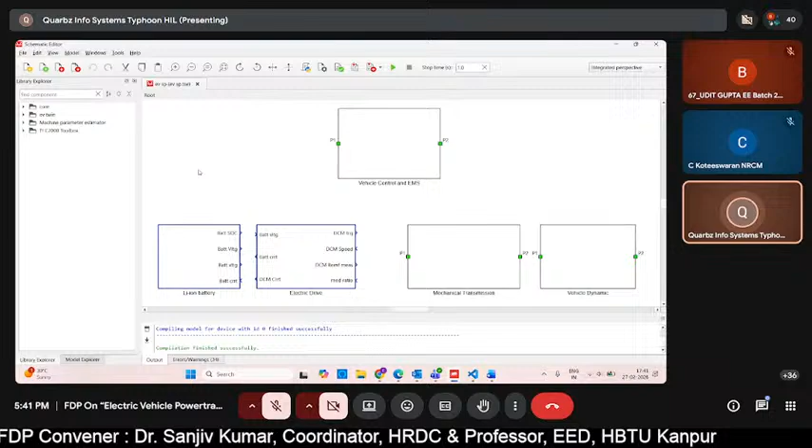As we started doing a hands-on model on electric vehicle-based signal processing, we initially developed around 2 subsystems out of the total 5 subsystem blocks that were supposed to be developed. So we will continue building the same model. As you can see on my screen, I have opened the same model we created last time. Hope you are all ready with your software. If not, I'll give you one minute so you can open the same example model on your PCs, and then let's start with the third subsystem, the mechanical transmission unit.

Before that, let me know if my screen is visible and I'm properly audible. Can somebody confirm? Yes ma'am, the screen is visible and you are audible. Thank you. I'm waiting a few seconds, then let's start. Meanwhile, you can all open the model.

Good evening, Ira. Yes sir. Good evening, actually sir, before this talk I had a talk. Yes sir, why sir. I was not available when you were introduced. I'm very sorry for that. I welcome you. Okay sir. I hope my learners already welcomed you. Yes sir, yes sir, the introduction was given. Thank you, sir. Okay sir.

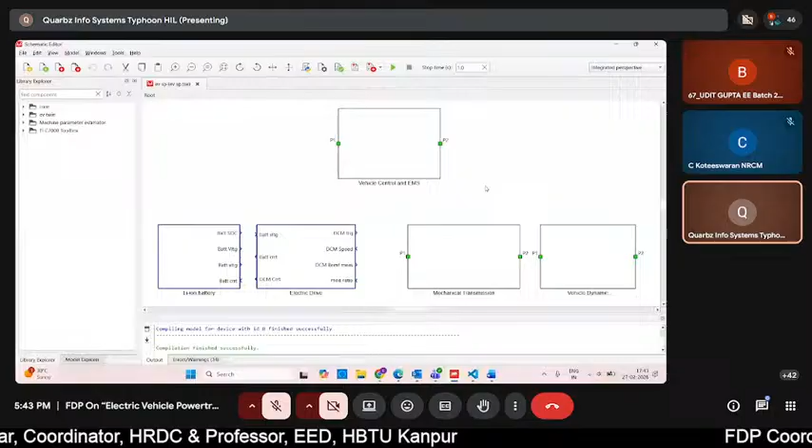Okay, then let's start with the third subsystem. Until now we have created 2 subsystem blocks: the first one is the lithium ion battery pack, and the second one is the electric drive unit. So we know that in the vehicle we are creating, we are developing the model based on the components of the signal processing library, and this complete library has certain blocks which are defined in blue color.

As I specified initially during the session, Typhoon is basically having 2 different types of processors. One is for running the plant side simulation at a higher rate, at the nanosecond scale, and the second one is for the CPU side simulation, where we run the signal processing and controller side part at the microsecond level. So now we have the third unit, the mechanical transmission.

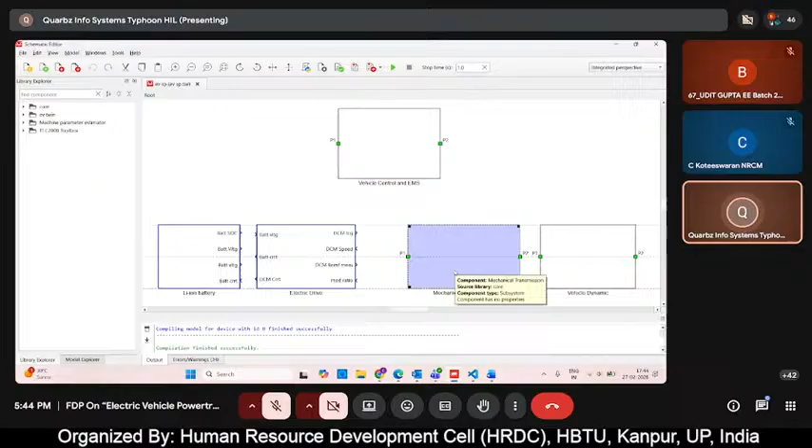We know that in this subsystem, all the subsystems are actually connected to each other, and there will be some signal which interacts with the other units as well. So let's see what is there inside the mechanical transmission. Just like we did last time, double click on the mechanical transmission subsystem block.

We will delete the part already mentioned there and start developing the model. So let's first take a component called signal input port, next we will take another signal input port, and lastly we will take a signal output port.

Next, let's type in and take a termination block. We are using this termination to denote what type of movement will happen when we apply the brake force. So termination means ending something, so we will give this particular signal towards termination. The name of this signal, I will keep as brake force. Next we have the termination block.

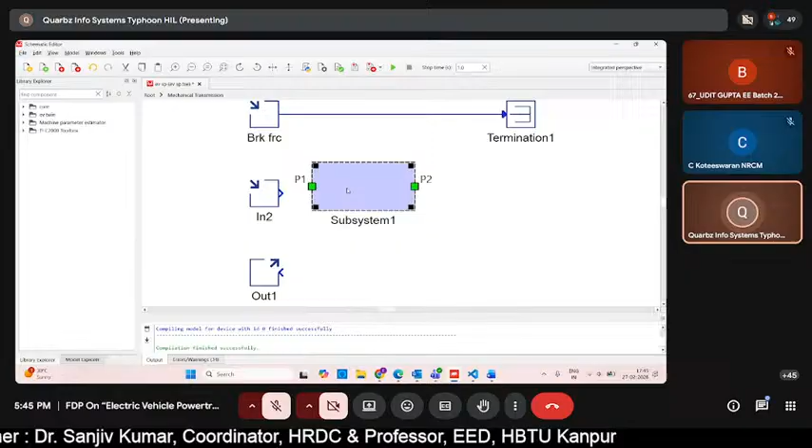Then at the bottom, we will take another subsystem here. So just search for a subsystem block and place it like that. Beside it, we are going to take a gain block. After the gain, we will take a signal output port.

Similarly, at the bottom, we will take another gain block. We are going to reverse the direction, connect the output to the next output, and we will take a signal input port here. I'm also going to place it so I flip it and connect the output of this signal input to the gain block.

So I hope till this part it is clear. Now we will also name other input outputs. So we have DC motor torque, and the next one we have is DC motor speed.

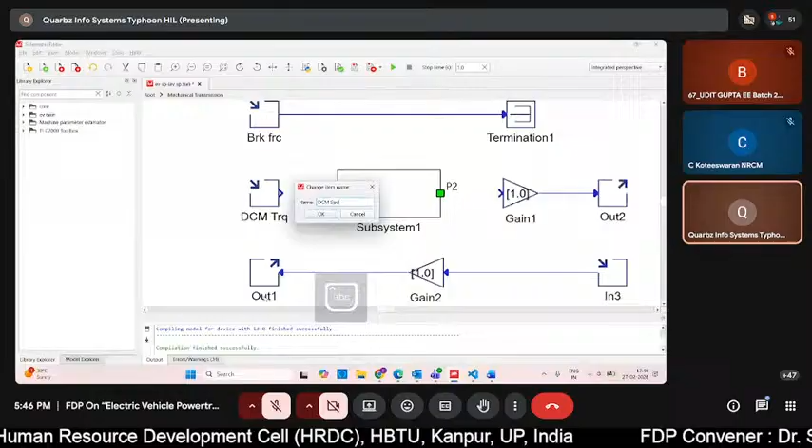The gain blocks that we have taken represent the mechanical transmission ratio, so we are going to name them MT ratio. The value of this has been pre-calculated for this example using the standard equations, so the value for both blocks will remain the same.

Lastly, we are converting these torque and speed signals into the transmission unit signal. So whatever mechanical parameters we had are now transmitted and converted to force and velocity signals - we have wheel force and wheel velocity.

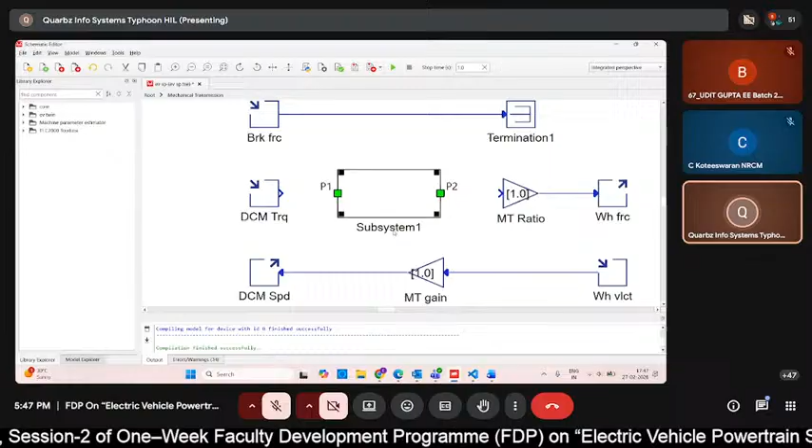Next, the name of the subsystem is efficiency. Inside this block, we will take a signal input port, then another gain block, and another gain block at the bottom. Over here, we will take a component called signal switch.

Let me name the gain blocks. So this one will be traction, and this one will be braking.

After this, we will take a termination block over here, connected to the output of the switch. And at the top, we will take a signal output port.

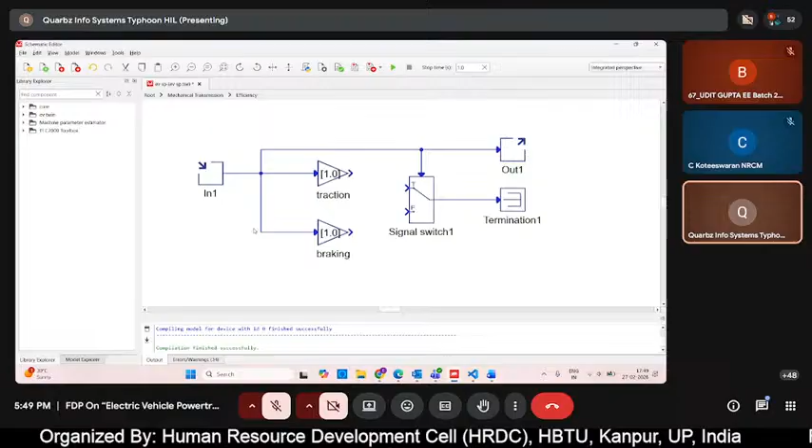Now we will connect the braking input also to this input coming from the signal input port. We will connect the top control signal of the switch also to the same line, and the output to the control signal. Let me just connect traction and braking to the signal switch.

I will explain what we have created here - we are trying to see the efficiency of the system. The input coming over here is our DC motor torque. Now torque, as you know, is applied from the machine which is inside the vehicle. When we discussed last session before starting this model,

one was the positive force, which we also know as traction force or propulsion force, and there was also the resistive force. So in case of traction force, whenever the motor or machine is supplying some torque, then only the vehicle becomes in motion, and that is the positive force. And then it is having a factor with the resistive forces, and we get a net force, which is the force that helps us know what type of propulsion the machine is doing.

So in this case, whenever the torque input is coming, we are getting the information and multiplying it with a factor for the traction and braking gain, then moving towards the signal switch. In both cases, if there is some torque available, definitely the machine will be in motion. So our traction force will be greater, the signal switch condition will be true, and we will get some output which will be our wheel force.

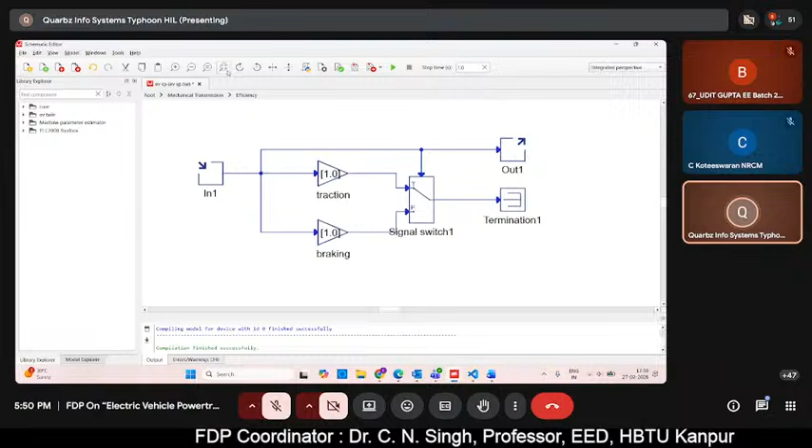But in case we don't get any input in the torque command, the braking will be automatically considered and the vehicle will be stationary. So that value will automatically go to the termination block - that is what this signal switch condition is denoting.

Now let's just name the traction and braking, and define the value of traction and braking gain. Double click on traction - this one is 0.92. And for the braking, it is 1 divided by 0.92, just reverse of the first one. Traction and braking: 0.92 and 1 divided by 0.92.

Then I will come back to the mechanical transmission unit. So at the top over here, you can see root, mechanical transmission and efficiency. From efficiency, we will go back to the mechanical transmission subsystem. Now we have the input and the output, so let's connect it to the row.

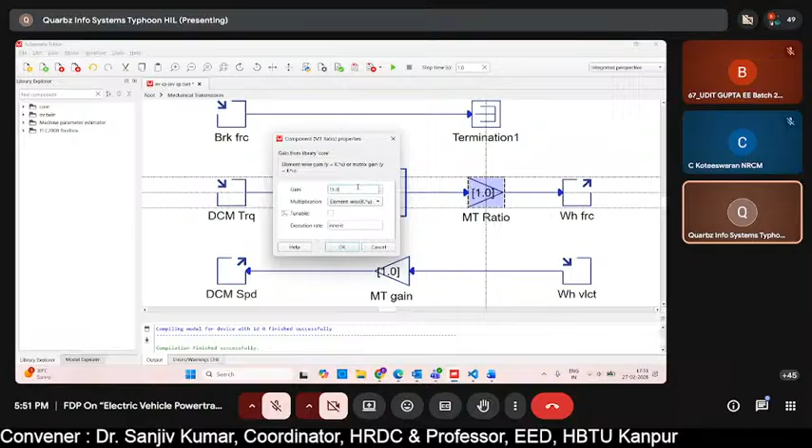Everything looks okay. Then we have to define the value of the MT ratio. Double click, the value will be same in both lines - the value is 15.0654. The second one as well, 15.0654.

Okay, now we have completed the mechanical transmission unit. I hope all have completed till here. Is anyone still doing it, or can we continue to the next subsystem?

Okay, so let's just continue to the next one, which is the vehicle dynamic unit. Let me just check one thing.

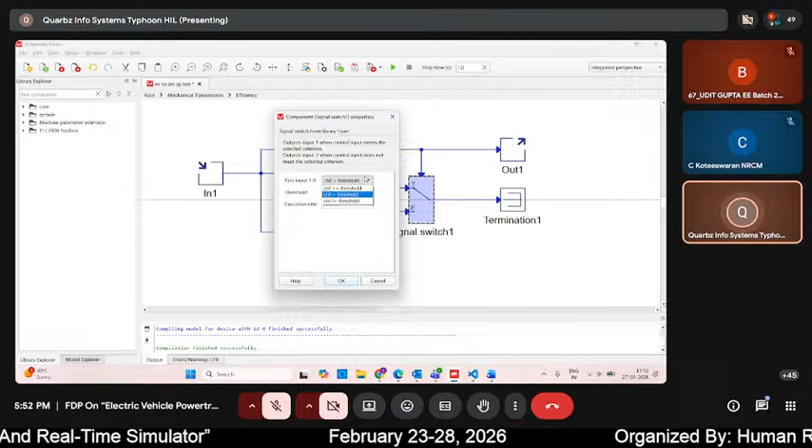The signal switch condition - okay, just one little change in the signal switch. We will select the condition of the switch to pass the signal with the control command greater or equal to the threshold, and the threshold value we are going to put as 0.

Let's come back to the root window. Now we have the fourth subsystem, that is the vehicle dynamic part. So let's quickly start making the model.

We will delete the initial part. Now let's start with the blocks, so again we will take a couple of input outputs. Let's search for the signal input block. After this, we will take a sum unit.

We will just change the symbol of the unit, so it will be plus minus. The input we are going to connect at the top of the sum block. After this, we will have a gain block, and after the gain, we have the integrator block.

And then we have signal output port. So 2 of them we will be taking. Let's place it like that.

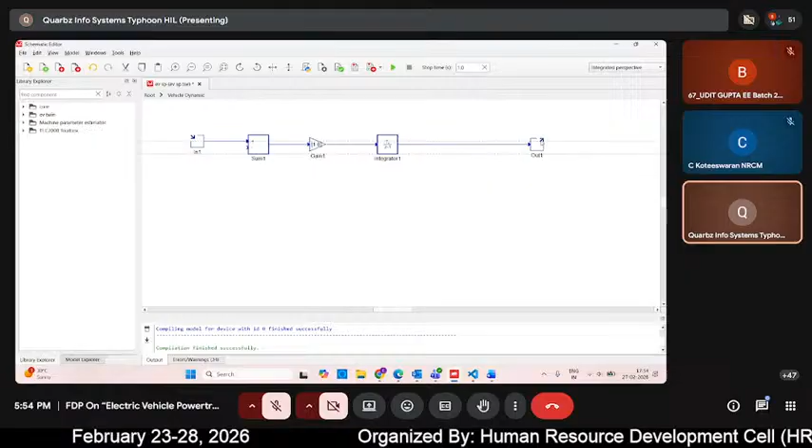Next, we will take another block, that is probe over here, so again, to just kind of visualize the signal that we are planning to use here.

Okay, let's start naming them. So we have wheel force here. After that, we have vehicle tractive force.

Next, we have the gain block by the name of mass. Integrator will be same, the output we will name it as vehicle velocity. Then we have another gain, another signal output, again we will name it as vehicle velocity.

At the bottom of this, now we will take a product block. We are going to flip the direction, and instead of 2, we will take 3 multiplication sign.

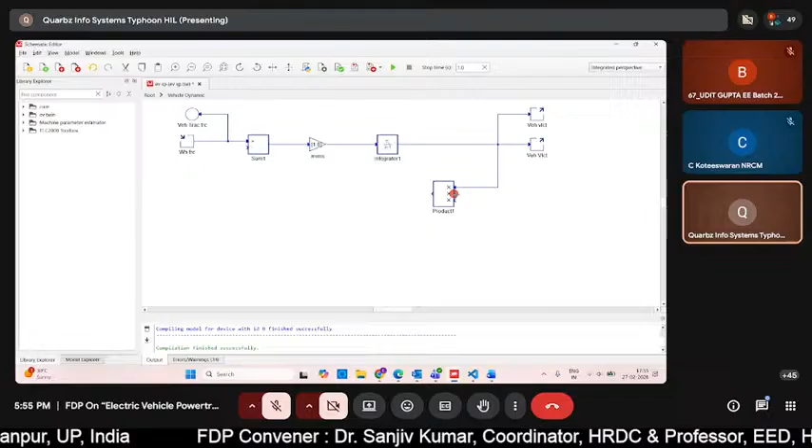The top part, we are just going to connect it to the same line. The second arrow, again, we are going to take it here. The third one, we are going to connect to a constant block.

We can flip this and just connect the constant here. We will be taking a termination block, and we will connect another constant here.

So the output of the product will become the input for the first, input for the sum. The second input will be again connected to another constant block. Again, we can flip and connect it. And the third one, we have again a constant block and a gain block.

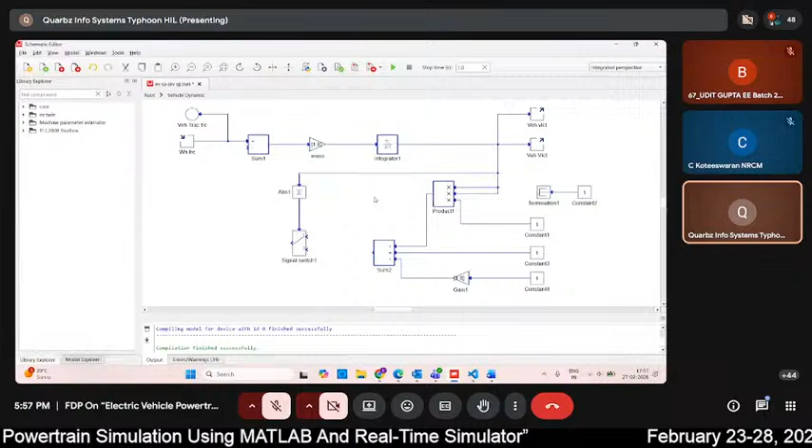Here we will take a signal switch. At the top, we will absolute value. I'm just going to rotate it downwards because this is going to go as input to the signal switch. And this absolute value input is going from the velocity, the vehicle velocity signal.

At the bottom here, again, I'm taking one constant block and just connect it to the false part of the switch. The true part will be connected to the sum signal, the output of the sum signal. And lastly, over here, we will take signal output port, and along with that, we will also take a probe.

Now we can just one by one name all the components what we have taken. So again, this output at the top you can see is the wheel force or the traction force. Now what we are doing is we are calculating the vehicle resistive force as well, so that we know what is the net force. So now for calculating the vehicle resistive force, let's see what all input we are considering.

If you remember, we discussed about some of the equations that are being used. So this is the vehicle resistive estimated. Then at the bottom we have the resistance force. Over here at the gain block, we will name it as mass, and will be the road slope block.

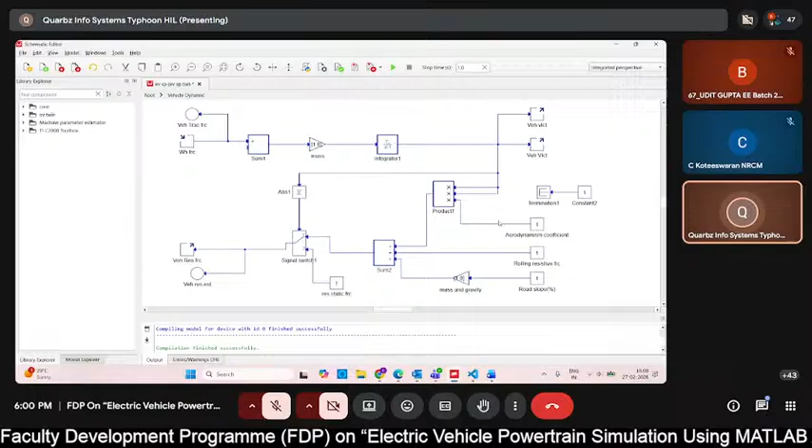In the bracket percentage. Above that, we have the rolling resistive force. At the top of that, we have the aerodynamism coefficient. So if you remember, following the same equations, we have the aerodynamism coefficient. In that equation, we basically use the mass and along with that, the velocity square and the aerodynamism coefficient as well. So all three we have considered.

If you remember, mass was usually used in all the equations. So along with that, we have the rolling resistive force. So this is the total force which is calculated. So already it consists of all the calculated value for mass and rolling resistive coefficient and so on. So whatever total value was calculated, we will directly feed it here.

And the third one, that is road slope, so this one is for the gradient force. So if you remember, whenever the vehicle is moving up or down the slope, so there will be some angular force applied. However, the value of the slope will be 0 in this example, but at the front of that you can see again the same multiplication with the mass and gravity, and then going towards as an input to the rolling resistance. So this is just demonstrated to explain how the rolling resistive is basically calculated.

Over here at the top, you can see there is one signal coming from the constant which is going to termination directly. So this is the wind speed. So in this case they are considering zero wind speed also. So that's why the aerodynamism force in which the wind factor is taken, that will actually not be considered in this example. So again, let's just quickly name all the blocks, and after that we will just provide all the values.

Okay, I can see one signal we did not connect, that is the bottom of the sum block. So this is definitely the difference between the traction and the resistive force to calculate the net force. So just connect the minus part of the sum block directly with the resistive force.

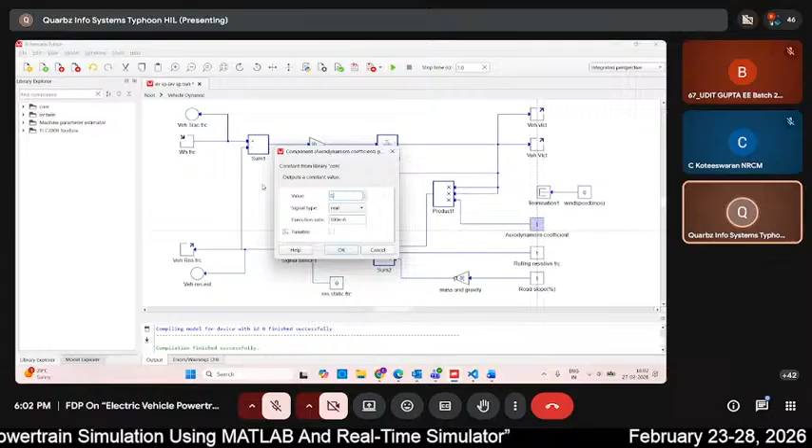After this, we have the wind speed constant, so this value is again 0. Next, we have the aerodynamic coefficient, usually between 0.4 to 0.5. So it is kept at 0.428 in this example.

Next, we have the rolling resistive force, calculated as 135.77. And lastly, the road slope is again 0. Since this one is in percentage, mass and gravity will be 692 multiplied by 9.81, then divided by 100 to convert the percentage to the factor. 692 is basically the value for the mass of the vehicle.

So this is it, we have just provided the inputs for all the blocks. I think this subsystem is also complete. So is anyone having any questions till this part, or anyone is just completing, or we can move to the next one?

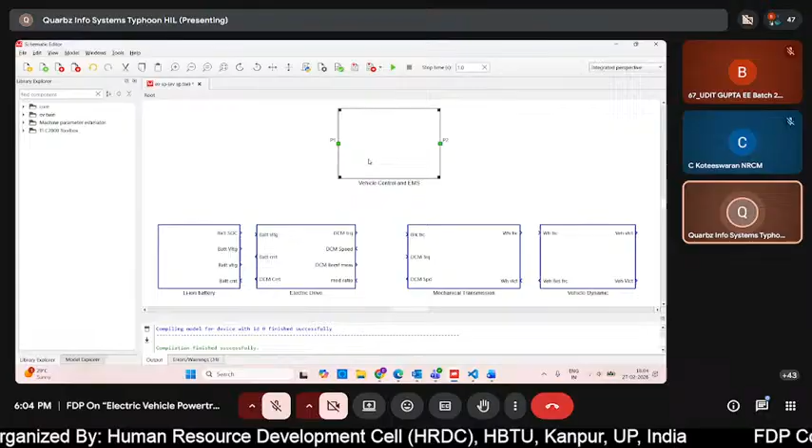Let's move back to the vehicle control and the EMS part. Again, double click on the subsystem. Let's start creating the last subsystem part also. Once this subsystem is complete, our entire model will be completed and we can directly move towards the SCADA panel. So let's start taking the blocks.

In the vehicle control unit, as you know, this is the essential part of the machine. It is basically controlling, monitoring all the things for all the subsystems. So there will be multiple inputs and outputs connected over here. First of all, let's start again with a signal input port.

Let's keep naming them also. So this one is coming from the battery part, so the name is battery SOC.

After this, we will just take a gain block. The calculated SOC will be somewhere in a decimal place, so we will just convert that to percentage. I will just change the name of this gain block to percentage, and we will connect a probe here to measure the percentage of SOC of the vehicle. Let's name the probe as battery SOC estimated.

At the bottom here, we will connect a signal switch, and the control input of the signal switch will be connected directly to the SOC. We will take two constant blocks here. The first one, I will just connect it to the true part. And the second one also, I'll connect it to the false part.

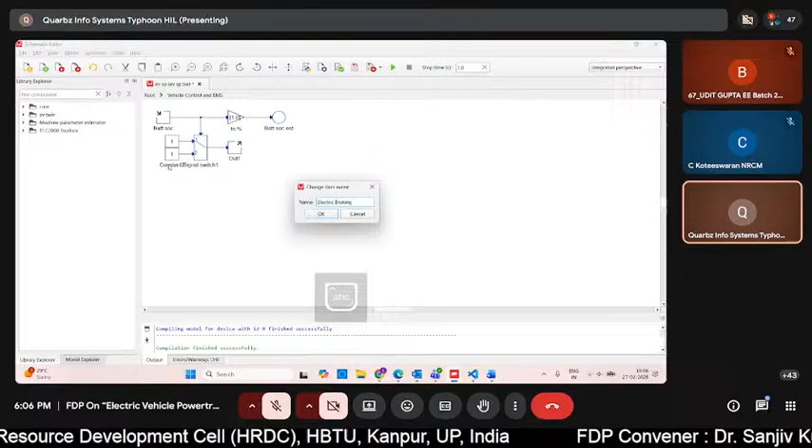And the output is named as brake force. Next, we will take a clock input. Next, we will take a block for the input of the drive cycle.

Over here, we are going to take a different block by the name of 1D lookup table. The lookup table is basically used when we want to provide some value, which is basically x, and y is the function of x. So we have vector input, or multiple data points for x and the function of x, and we will just directly feed them here. The output will automatically follow as per the value that we have fed in the x and the fx part of this component. So let's search for the 1D lookup table, and we will just connect it from the clock.

And I will just name this as ECE drive cycle, or driving cycle. Let me just put it a little bit lower.

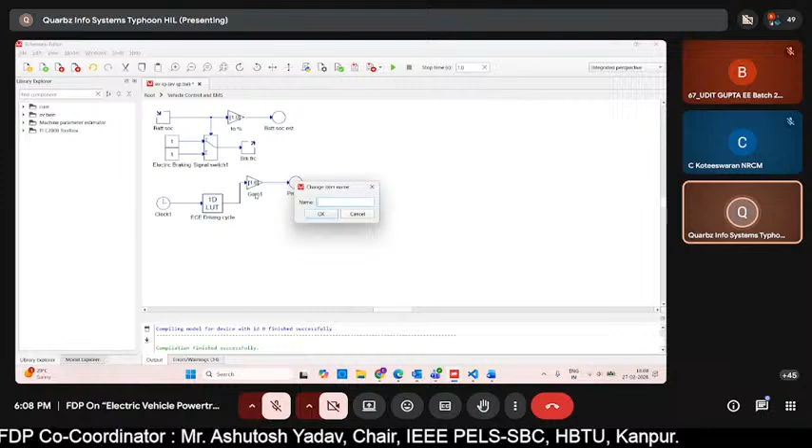Okay, let's take a gain block at the top. We'll connect the output here, and we will connect a probe to the output of the gain. Let's name it as to kmph, and the probe as requested speed.

At the bottom, I will take another subsystem block.

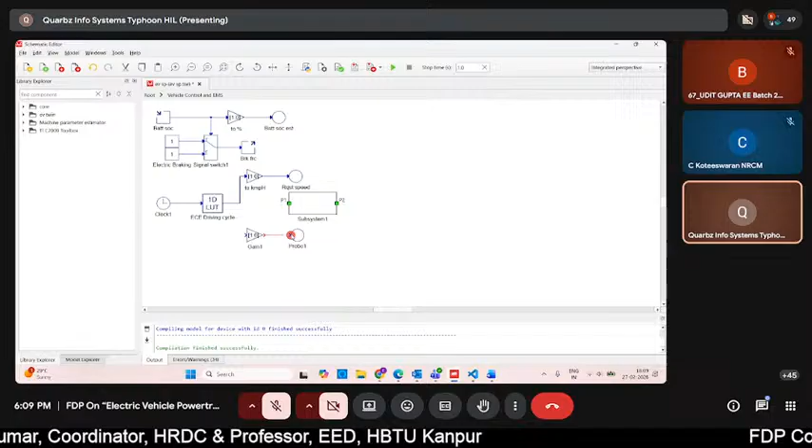Below this, again, I will take a gain block. Similarly, another probe over here. Let's connect them. And again, connect this one to the initial input. So we will take a signal input port.

Now again, I'll change the name. This one is vehicle velocity. The gain block is known as to kmph. I've used the same syntax, and the probe will be the vehicle speed.

So what we are doing is, because this is the controller part, we are just having a subsystem block here, which is going to do the operation of the PI control. We know about very common PID controllers. Usually the PI control is implemented inside such strategies, and it will be doing the proportional as well as the integral based control. So what we have to provide as input is the reference speed that we want to set, and the measured speed that we have from the vehicle. Once we compare the two, whatever error we get, accordingly the controller behavior is shifted, and the successful control is when we are able to achieve zero error in the complete functioning of the model.

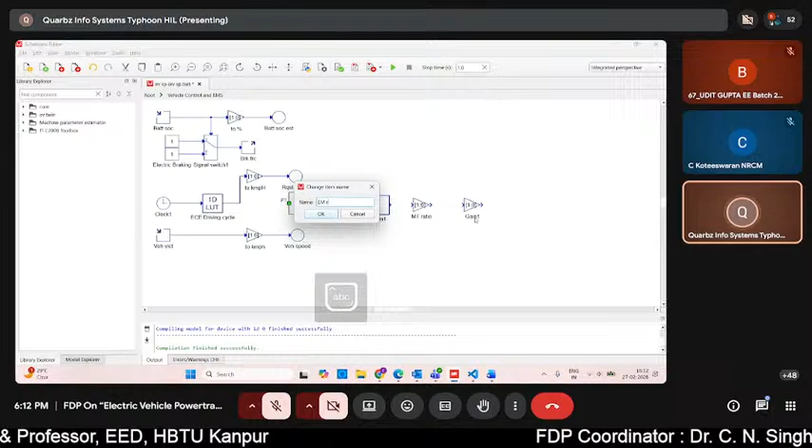The values of these constants will always be the same in the entire model. Again, we have another component here. So now after it is converted to the mechanical signal, we want to convert it into the electrical signal. So we are also using the EM ratio, or EM conversion, I can name it. After converting these signals, we will again have to feed it to the PI control.

This time we are doing the PI control for the current part. Let's again search for a subsystem block, and for a reference right now, we are just placing it here like that. And after this, we will again take a sum block.

After the sum, we are going to take a product block. The output of the sum, we will just connect to the first input of the product. At the bottom, we are going to connect the battery side voltage. And towards the end, we will just have to connect a limit block, and we will place a probe to observe the final output.

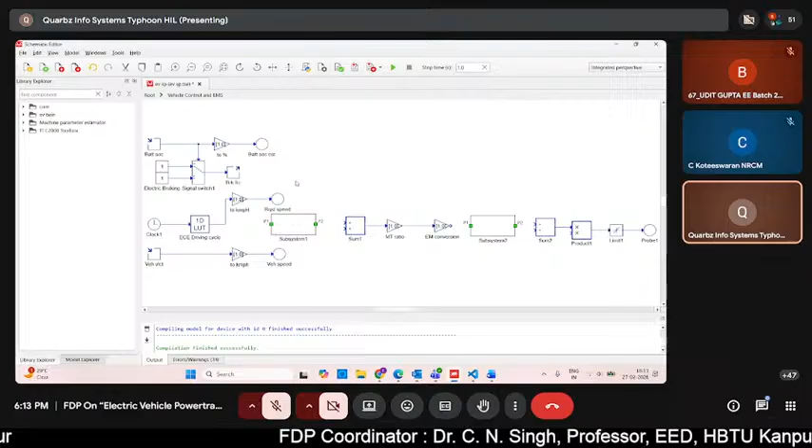Now, first of all, what we will do is create the subsystem part of the model. So let's get the PI control. I will double click on the first subsystem which is there, double click on subsystem 1. I will delete this part, and over here, I'm just going to take the reference signal, so I will take a signal input port. Similarly, I will take another signal input port.

So I will name the first one as measured. Then I will take a sum block and I will reverse the sign to plus minus in order to compare the reference with the measured. Let's connect them. Then we have the gain block.

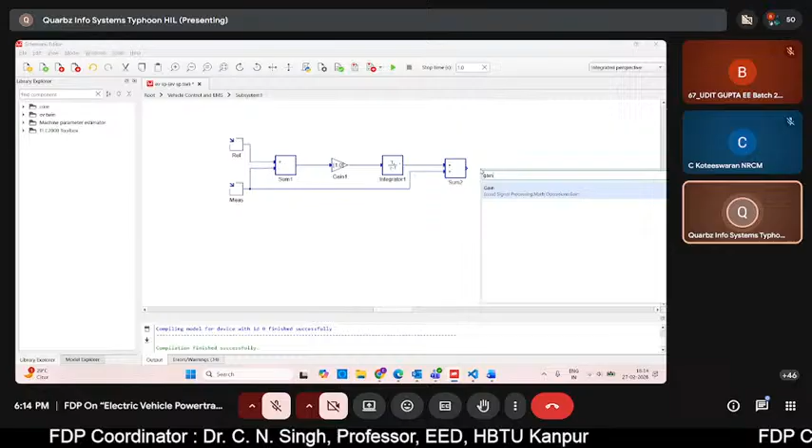After this, we will take an integrator, and we will again connect a sum block over here. Connect the top part of the sum again, the bottom we will again connect to the measured. And the final output again going to the gain block, and finally, we are using it to go to the signal output port.

Now we will just change the names. So the gains have to be named as, this one is for the KI input and the second one is for the KP input. So the proportional and the integral coefficients, we have just named them. For the first one, we have the value of KI calculated as 2.372. And for the second one, that is KP, we have the value as 6.5657 e to the power 3.

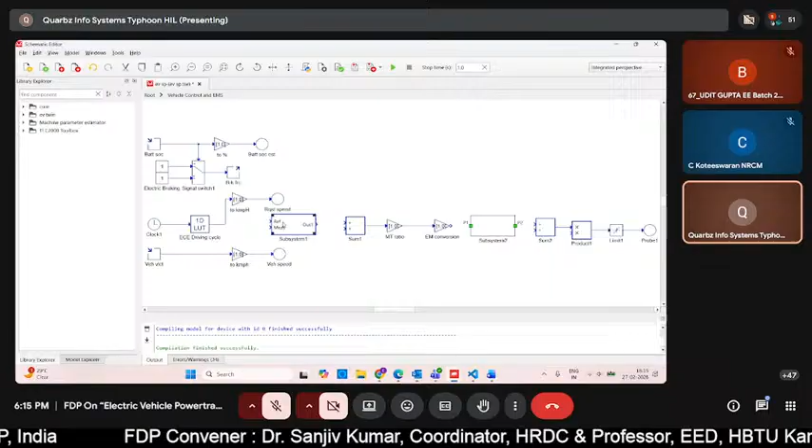So that's it, the PI control part is done. We can go back to the model now. So we have the vehicle control and the EMS unit. Now what we will do is just simply connect the reference to the top part.

So reference we connect here, and the measured signal, we are simply going to connect it at the bottom, that is on the vehicle velocity. After this, the final output will go to the top of the sum block.

The bottom part now, we will just connect the bottom to the vehicle resistive force. I will take another signal input port, change the name to vehicle resistive force, and connect it at the bottom of the sum block.

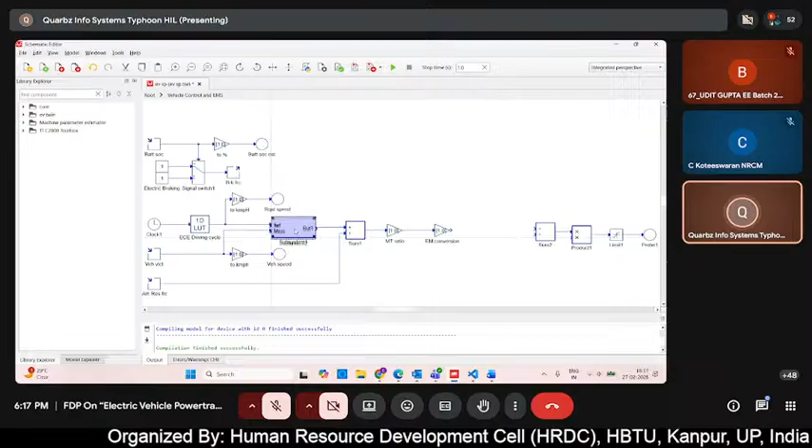Next, I will delete subsystem 2, and simply copy and paste subsystem 1 block here, so we don't have to create the same subsystem again. The blocks will be the same; only the difference will be in the coefficient value of Kp and Ki, so I will edit those values. Remaining part I'll keep the same.

At the measured input, we have the DC motor current. So again, I will take a signal input port and place it here, change the name to DC motor current, and connect it to the measured part.

After this, we again have the sum block, so just the top part we are going to connect to the sum block. Next, we will take two more signal input ports for the final signal input.

This one is the DC motor back EMF, so we will place it and connect directly with the sum block. Lastly, we take the final signal input port, and this one is the battery voltage. So change the name, battery voltage, and connect it to the bottom of the product block.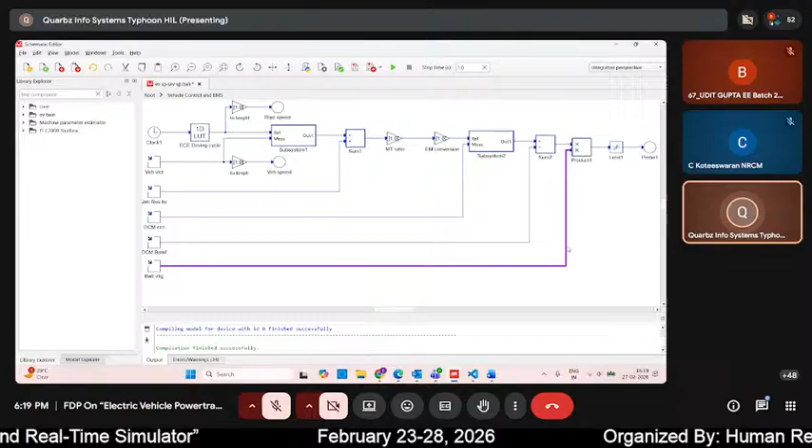Firstly, we will connect the probe at the very last signal, that is for the battery voltage. Let me search for probe, and we can connect it here. Again, I will name it as battery voltage measured.

Next, we will have a gain block, so let's search for gain. I will take another gain block here. Basically the back EMF that we are doing the electrical conversion, and then we are providing it to another gain which converts it into RPM, so we have it converted into speed. The EMF is being converted using the EM conversion.

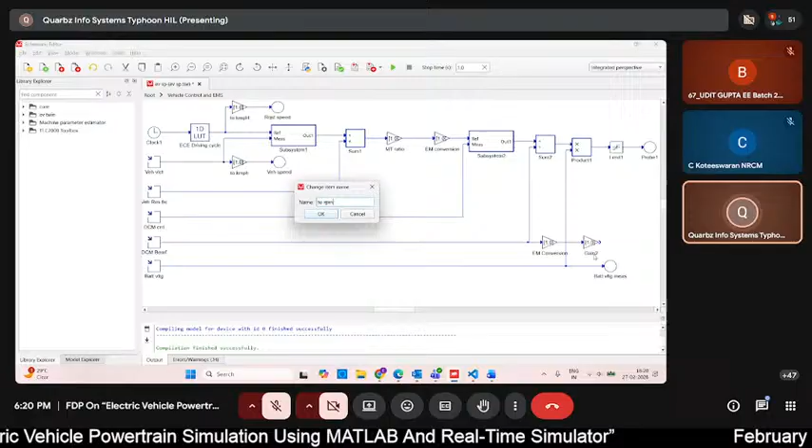This gain will be converting it to RPM, so I will name it as to rpm, and lastly connect a probe again. I will change the name of the probe; this time the name will be DC motor speed.

Before this, now we will connect another probe here on the DCM current, so we will name it as DC motor current measured, because all of these are the measured signals, not from the drive cycle input that we will be providing.

Then we will connect another probe at the output of the sum block, and name it as DCM voltage requested.

Now at the top of the subsystem, between the MT ratio and the EM conversion, we are also going to take a gain block here, and again use the same name, EM conversion.

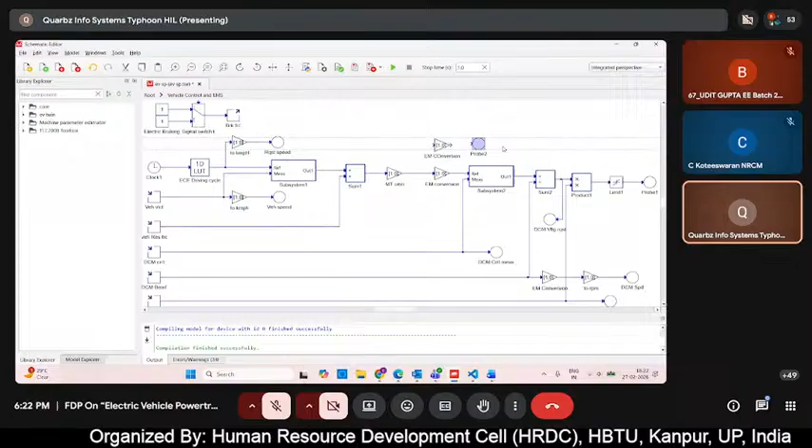We will take a probe over here, connected between the two. The probe is going to be named as DCM requested current.

And at the top, we have another probe connected directly to the signal, and we will change the name to DC motor torque requested.

Let me just open that sheet. Just give me a moment, I'll reshare my screen.

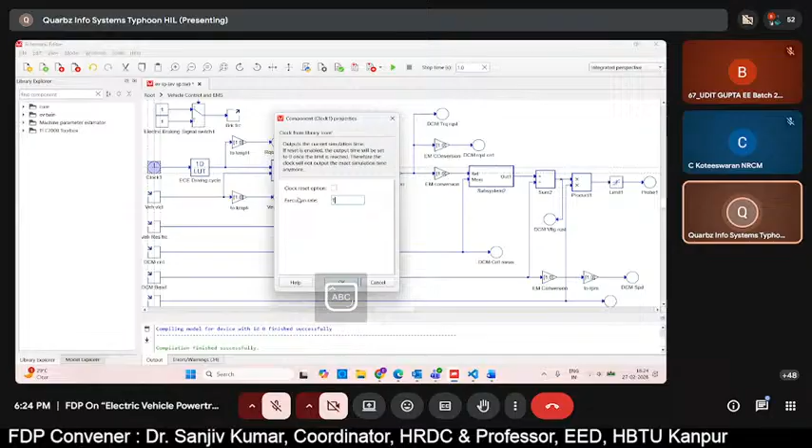Now let me show you where we are going to use these inputs. Let's directly come back to the model. So first we have this clock block. Double click on clock and we will delete the rate value and term it as a variable called TS.

After this, we will take the drive cycle input. Double click, and in the input value we will delete this part and paste the part which is inside our sheet. So let's take the input x value. You need to include the brackets as well, so just make sure that you are using all the values.

Just in the same way, I will paste it over there. Same thing I have to do for the fx part, we will use the y values here, and paste it here. After that, we will select the implementation as non-equidistant. We have the extrapolation method selected as linear, and the execution rate we will leave at inherit.

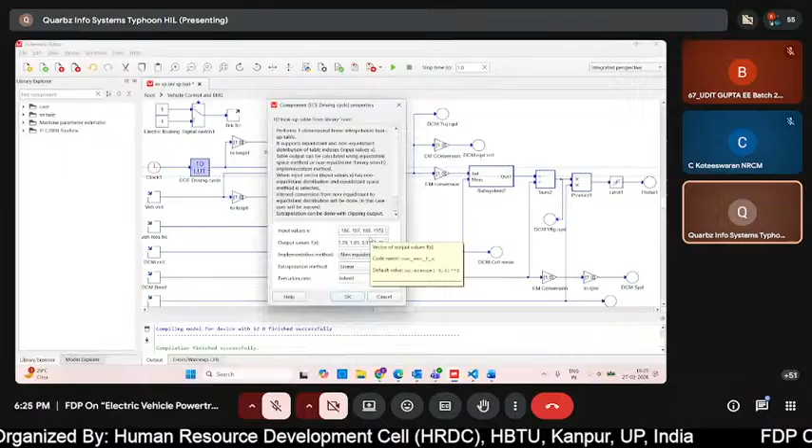Now these data points don't actually have time synchronization with our model. That's why we have used a clock block before them, so that whenever these values are executed, they are executed at the same rate at which the rest of the model is running. The model is running at a rate of TS, that's why we have used a clock to synchronize this graph to also run at the same execution rate.

Next, we have used the kilometer per hour gain block. We are converting this drive cycle output, that is our speed and the actual vehicle velocity, into kilometer per hour range. So what we will do is just multiply by a factor of 3.6, and the same thing at the bottom, 3.6. We have already given the values for the KP and KI system.

So let's mention the value of the other gain blocks. At the top, you remember that we have used a percentage gain block. So this percentage gain, the value will be 100, because we are simply converting the input value of the SOC into the percentage SOC.

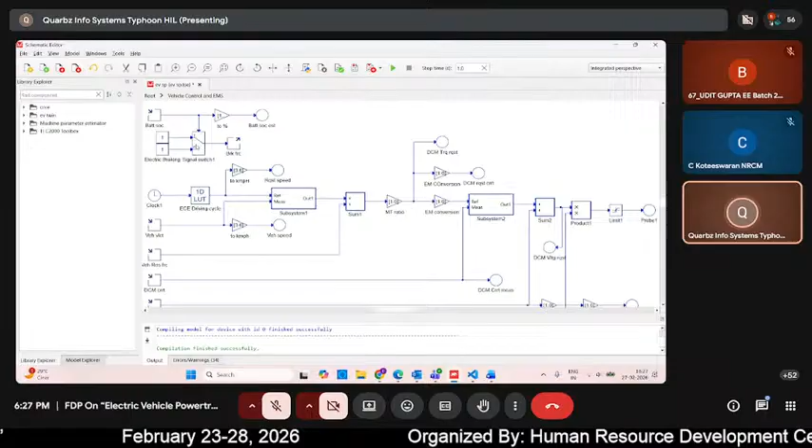After that, we have the signal switch. In the signal switch, we will use the condition control is greater than and equal to threshold, and the threshold we are going to keep as 0.9.

Next, we have the electric braking. In the electric braking, both the inputs we are just going to keep a value of 0, and the execution rate as TS. This is 0 and this one is also 0.

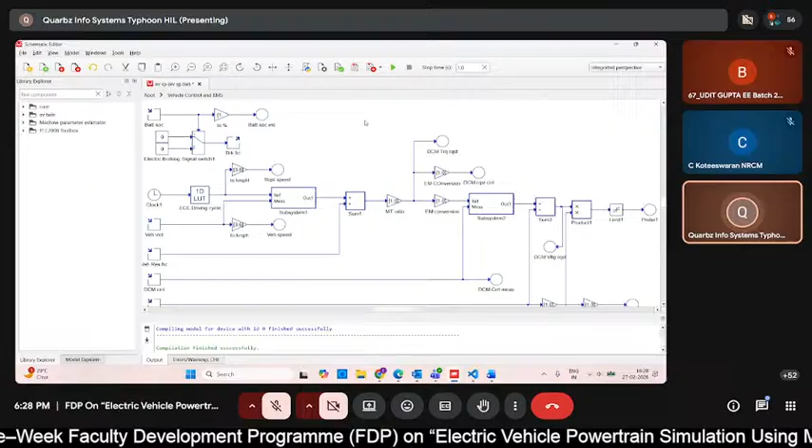So we are just denoting the braking through this part. Basically, whenever there will be some SOC, it definitely means that yes, the vehicle is moving and the battery energy is being utilized. If the SOC is increasing, that denotes charging. If it is decreasing, that means the vehicle is moving and the battery power is getting consumed. So in that scenario, whenever we have the SOC, we will read out what is the estimated SOC. And in case whenever there is no input coming from the SOC side, we will consider that the value is stationary, the vehicle is stationary, there is no movement. So automatically the brakes have been applied and the brake force will be generated.

Next, we have the subsystem for the MT ratio. Let's go towards the next block. The MT ratio value will be same, which we used in the mechanical transmission unit. This time we will just divide it, so it's 1 divided by 15.0654.

We have the same value for the EM conversion, just in the factor. So we have 0.2865, and same for the above one.

And there is another EM conversion here at the bottom. So this one also uses the same value, 1 divided by 0.2865, to RPM, which is placed here. So we will just keep the value as 30 divided by np dot pi.

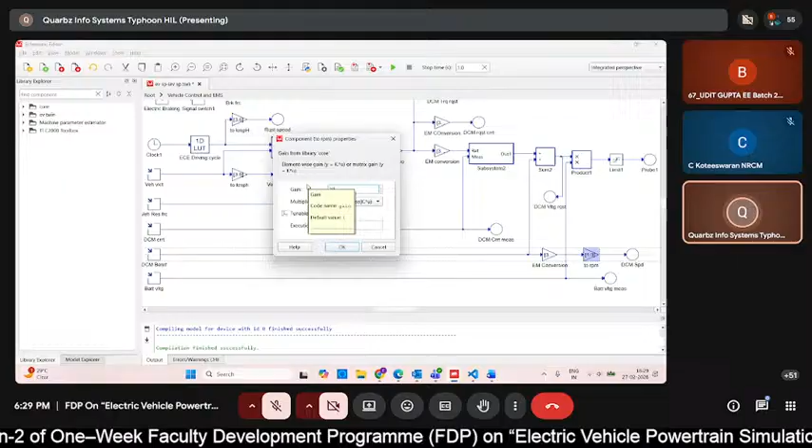Now in Typhoon, because it is a complete Python based environment, whenever we are using a variable associated in the Python library, we have to use it in this syntax: whatever is the function name, dot whatever is the variable name. So inside the numpy function, we have the value of the pi variable stored, and we use it in this format, np dot pi.

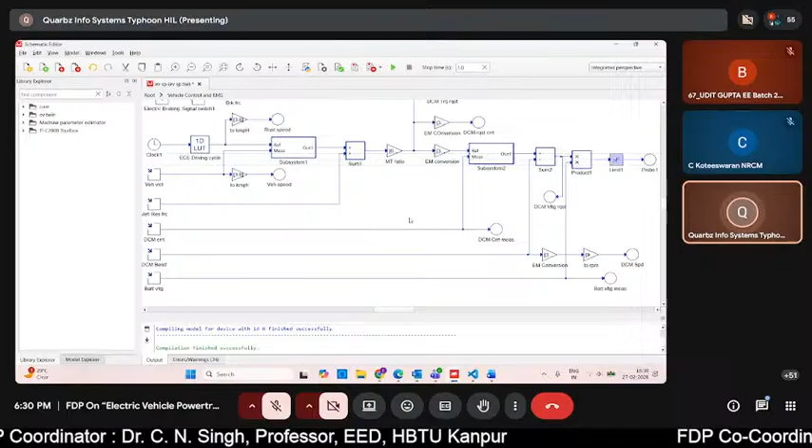I think after this, the second subsystem also, we have just pretty much provided all the values. So what is remaining is just the limit block. Let's put the final limit block. The upper one we will keep as 1 because this is the modulation signal, and the lower one we are keeping as -1. And lastly, we have to finally declare the execution rate of this model.

So at what time rate is the model completely going to run? Before that, let me come back to the model and we will just initialize it. Like I told in the first session, we have this model initialization script. So just open this script and we will define the value of the TS variable over here. We have 1e minus 3, so at 1 millisecond we are going to run this particular model. That's it, let's click OK.

Now, the only thing left is to connect all of these subsystems with each other. Once the connection is done, we have only one work remaining, that is to construct the entire SCADA panel. Of course it will take some time, but let's start moving.

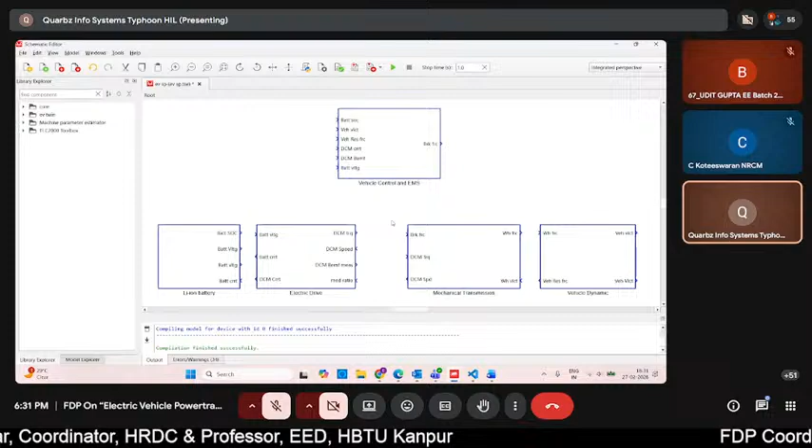So for connection of the entire subsystem, let's follow step by step. There are some inputs and outputs from every subsystem. Now we have the option to place those inputs and outputs in such a way that the model looks clearer. Because I already have an image with me of the model, I exactly know which signal is going to which block. That's why I'm just going to do the placement of these signals. This is not at all a compulsory step for anyone, so you don't need to follow this, but you should at least have an understanding of how to do it.

So suppose I start with the lithium ion battery. I know that I require the battery SOC at the first output, so I'm just going to double click on the battery SOC signal output port, and the side I will select as top, and the index number I select as first. When I go back, this is showing at the top, and right now no other signal is there, so this is showing at the center. But suppose if I select another signal at the top, then this will come at the first position.

Similarly, I need one battery voltage also at the top, so I will select top and index number 2. I need one battery voltage on the right side, so I'll select right, index 1. And lastly we have the battery current, so this one is again on the right, index 2.

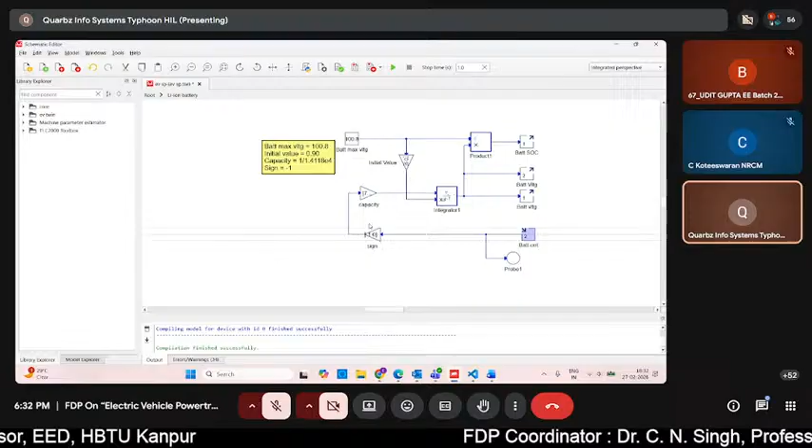Next, we have the electric drive unit. Double click again. So we have battery voltage and battery current on the left, index 1. And this one is again on left, index 2. We have DC motor torque, this is going to the mechanical transmission, so this one will be on right at the first index. And the speed is also going to the transmission unit, so again right and at second place.

Lastly, we have the mod ratio, this input is basically going to my controller, so I'll have it at the top with auto index, or I can just leave it like that. Okay, I can put 3. There are 2 other signals: DC motor back EMF and DC motor current.

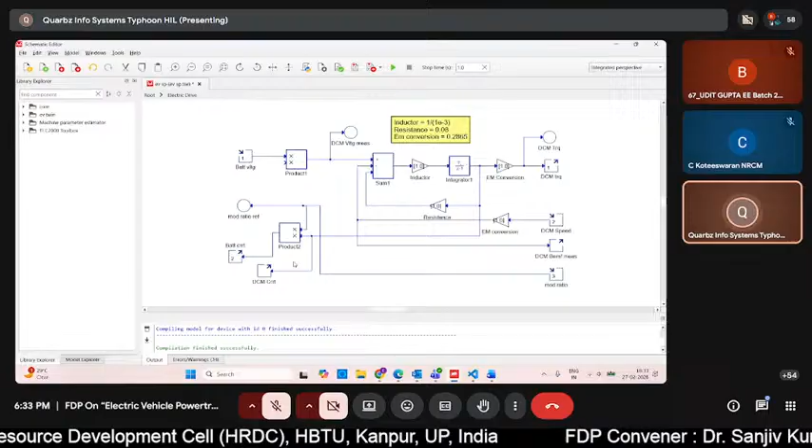So firstly, we will take the DC motor current, this is also at the top, index 1. And lastly, the back EMF, this is also at the top and at second place.

Lastly, the third subsystem that we have is the mechanical transmission. So the brake force is coming from the controller part, so we'll keep it at top. The DC motor torque is basically coming from the left side at position 1. This is also on the left. And wheel force and wheel velocity will be on the right, going to the next subsystem.

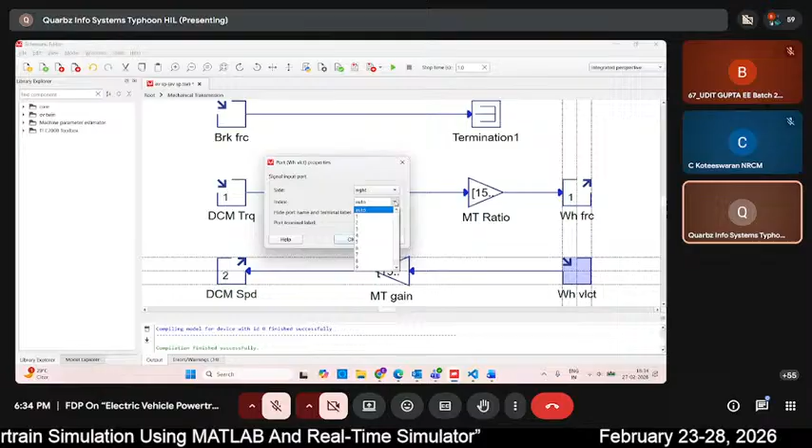Okay, next is vehicle dynamic. So just one more change. We have wheel force on the left at index 1, and we have wheel velocity, so one of the velocity is again on the left. Then we have vehicle resistive force, on the top at index 1, and vehicle velocity will be again on top at index 2.

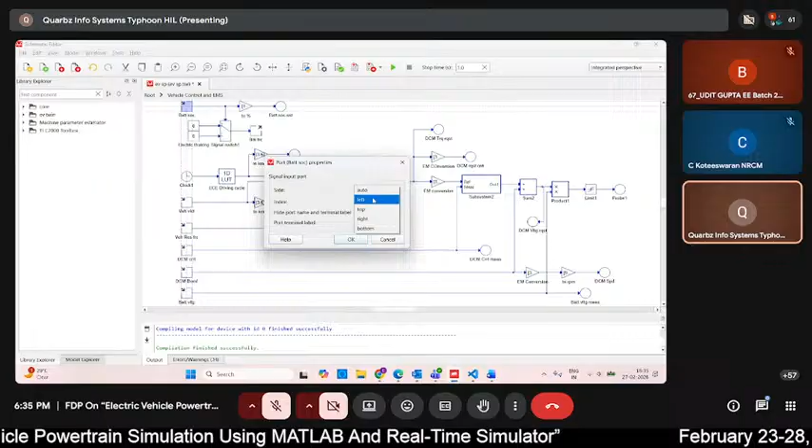Now we have the vehicle control and EMS. So we will just shift battery SOC, battery voltage, DC motor current, and DC motor back EMF. These four are required at the left side itself. Let me do the numbering so it's very clear: battery SOC on the left at 1, battery voltage at the left at 2, DC motor current at the left at 3, and DC motor back EMF again at the left at 4.

Next we have the mod ratio. So the final probe, oh okay, we didn't name this one. The final probe, which is the output of the limit block, let's just change the name to mod ratio. We will just... this is not a probe, this is actually a signal output port. I think by mistake I connected that.

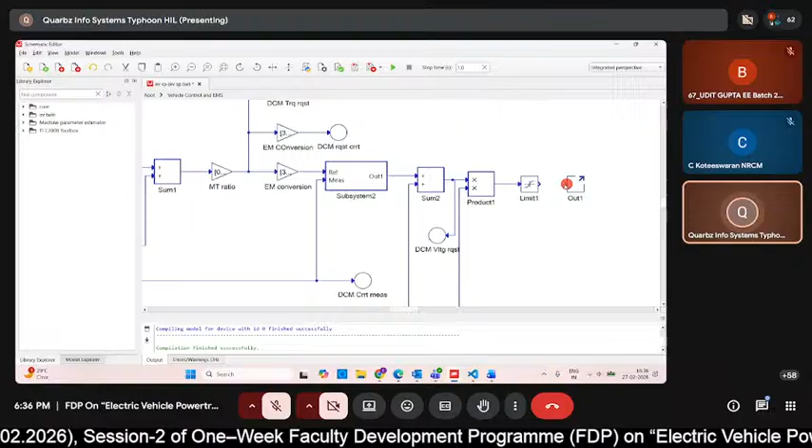Let me just place a signal output port. So this one is at the bottom and it connects to the drive unit. Let me change the name to mod ratio and select as bottom at index 1. Similarly, we have the brake force here, again at the bottom at index 2.

Lastly, we have the right side remaining. So we have vehicle velocity and vehicle resistive force. Vehicle velocity will be on the right side at index 1, and resistive force will be again on the right at index 2.

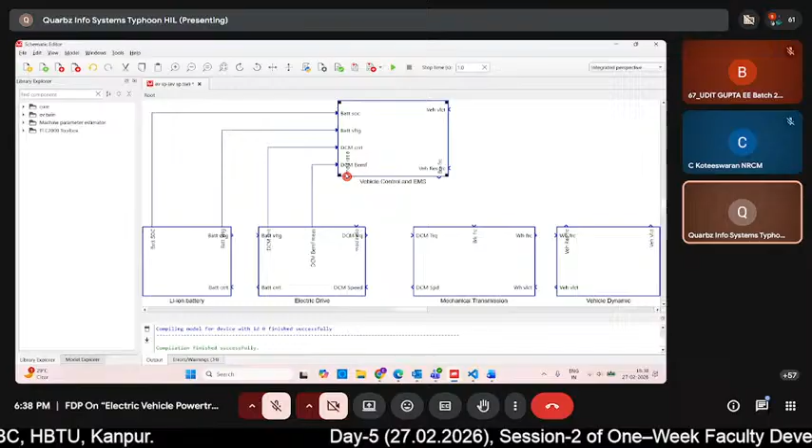That's it, now let's get back. This is pretty much done. Now let's connect all the subsystem blocks. We just need to match the names: SOC with the SOC, voltage with the voltage signal, the DC motor current with the DC motor current signal, back EMF, we have the mod ratios, the brake force, we have vehicle velocity, and we have the resistive force.

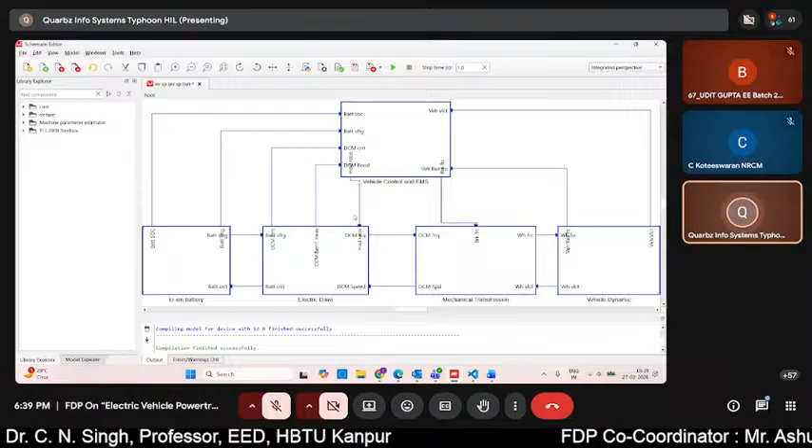That's it, so this is the final schematic editor model. Almost everything is complete. There is one additional thing in the model: if suppose you want to insert any image inside this particular model, any of the subsystems can also be initialized with an image. So if you would like to create your model in a better way, or denote every subsystem with its own display, there is also an option to do the import.

So what we are going to do here, I will just show you how to import the image, the steps to import it for one of the blocks, and you can learn the procedure. We are not going to follow it for all the steps because we have limited time. So I want to complete this model for this session.

Since I don't have hardware access with me, my colleague Mr. Shivam Shrivastav will be taking the sessions for tomorrow, both the sessions. He will also be showcasing how to use the Texas Instrument based microcontroller cards along with our real-time simulator, and how to work with those example models. So I want tomorrow's session, because it's very interesting and helpful, to be aligned as per our discussion or thought.

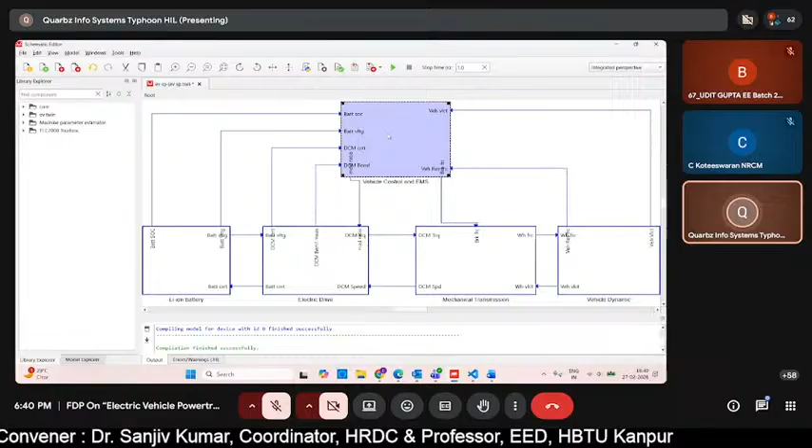So if we don't complete this model today, it will be an issue tomorrow, that's why I would like to complete this one. I will show you the case for one, and the same process we have to follow for any of these subsystems. Let me just right click, and then we have this option of mask.

So in mask, we have the option of mask editor. Click on mask editor, and you can see this dialog box has opened. In this dialog box, we pretty much have some options here: we have handlers and we have requirement also. Inside this, we basically have the option of handler, in which we have the define icon option. So what we do is we just need to write the command over here.

So what type of command will we use? We will just initialize image, and in the bracket, we just need to mention the image where it is being stored. So what I will do is very quickly, I'll just go to the folder and select the file. Let me show you which file I'm going to use.

This is for the EMS part. I'm just going to cut and paste it in the HBTU folder where my model is saved. I need to know the name of this file and its type - is it a PNG or JPEG file? You can see this is a PNG file, and the name is driver.png. I've saved it in the same folder where my model is. So in double quotes, I just need to define the name and extension: driver.png.

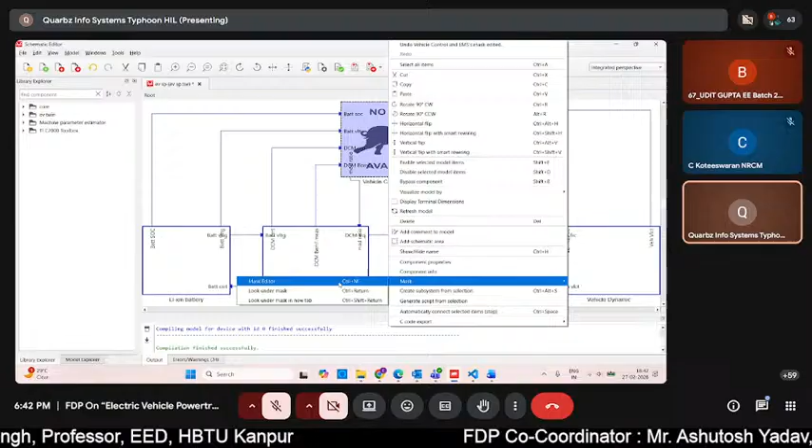So that's it, just click OK. I think there is some issue, let me see. Okay, I'll just do it one final time, it should work now. Okay, I think it's just a little issue with the syntax.

So we have provided the file extension, just the name.png. I think that was the right syntax, but it takes some time to load the image. It's the same syntax which we used before. It takes time because it has to identify the path where the folder is saved, but the process is the same. Similarly, we can do this for all 5 subsystems. That's it for this part of the model. Now let's click Control S and save the progress of the model.

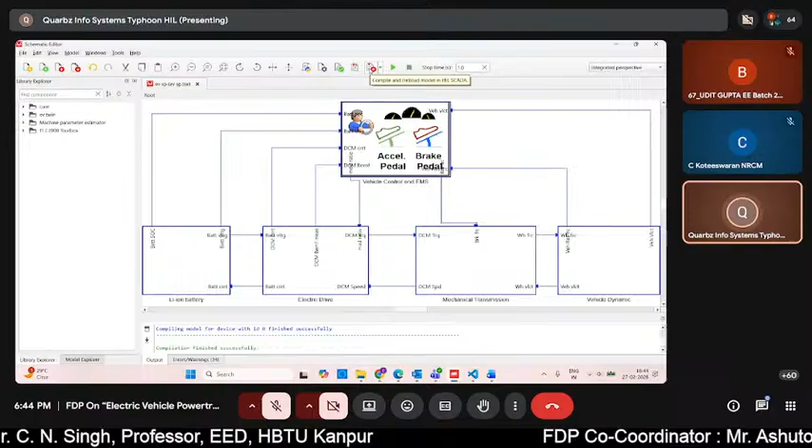Now we are ready to compile the model. If there are any errors currently in the model, we will see them now. Let's quickly click on the compile button. At the top menu bar, you can see the compile and load model in HIL SCADA with the red arrow, so just click on this icon. Okay, so we have one error: validation is not complete because electric drive product one input is not connected.

I think I forgot to connect one of the product blocks here. This is connected to the mod ratio ref. Let's see if we have any other error or if we forgot to connect something else. Okay, there are a few errors - they have different execution rates. Let's see which one it's talking about: signal switch and the vehicle resistive force.

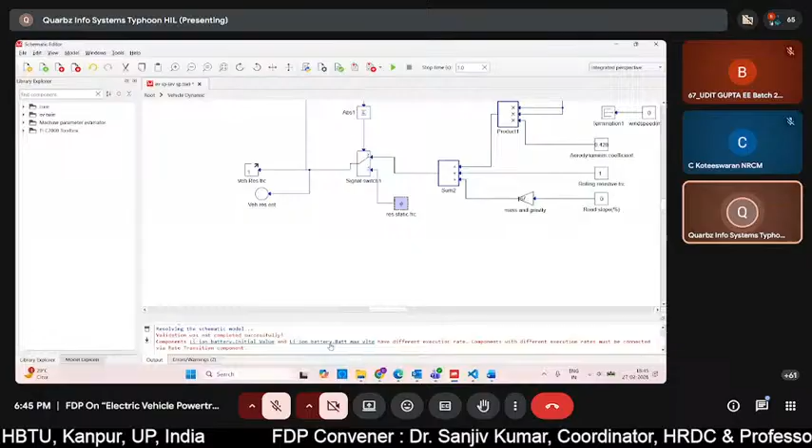This is running at 100 micro, and the signal switch has a rate of inherit. So what we'll do is change the resistive force to Ts as well, so the execution rate remains the same for all the blocks. Now there's the same issue with the battery initial value and max voltage - this one is also at inherit. Let me change this to Ts too.

So for all of these, we need to have the same execution rate. We didn't change those values, that's why we're having this issue. Let me change it for all the constants, because we need the entire model to be running at the same rate.

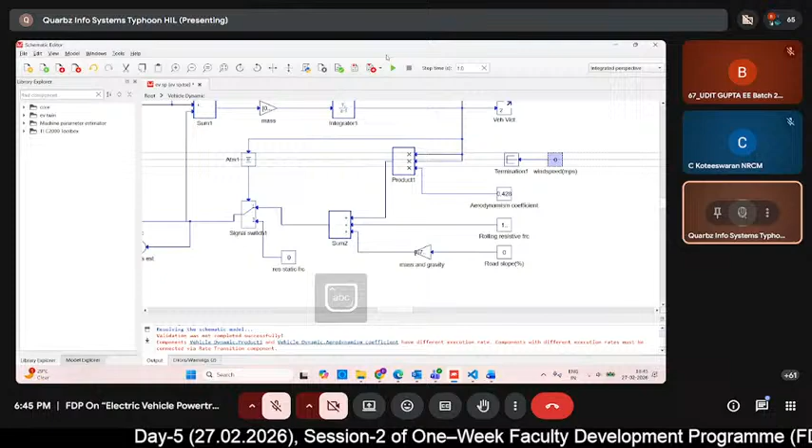Okay, so no other error. Our model is finally validating, let's wait for it to compile completely. It's a complete signal processing based model, so compilation will not take a lot of time. And you can see the model got compiled successfully. As soon as it got compiled, we have a new window open in front of us, which is the HIL SCADA window.

In HIL SCADA, we directly have a dialog box popping up asking whether to load the model in the virtual environment. Just like we did in the previous model, since we are not connected to any hardware, we can simply run the model in the virtual environment. So just click on load model to virtual HIL. Let's wait for all the settings to load, and after that we will start building the SCADA panel.

Okay, now for this model we have to create a new SCADA panel. We will just click on this plus button, create new panel. On the left side we have a widget library, so we are going to create a panel using different types of widgets here.

So first of all, we will initialize a few settings. Just like we had an initialization script in the schematic editor, we have another one here, also Python supported. We will define the variables here - we'll use a variable called storage underscore inverter underscore status. Even though this model is based on signal processing components, we are still trying to replicate it in exactly the same way a normal vehicle is created using plant components.

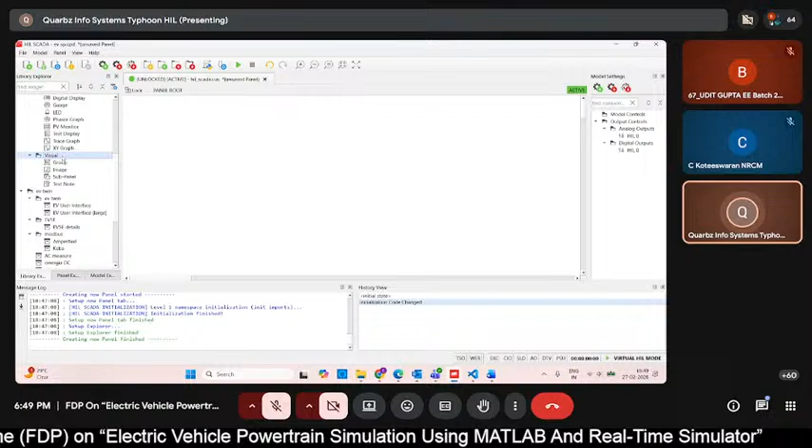Okay, the vehicle chassis. I'm just going to paste it over here. Now, from the left side library of the widgets, if I scroll down, you can see there is a heading called Visual. Inside Visual, you can see the image option is there.

So directly drag and drop this image block, double click here, and we can have this import option selected. We will just click on select image, go to the same folder, and use this vehicle chassis image. After this, you will see that the new image is imported here.

Now we want to use this as the background for my model. Above this, we are just going to place different subsystems and subpanels, so I'm just going to fix it on the screen. I need a big size model here, let me just expand it so I can place it in the entire screen. Yeah, I think this is fine.

Again, I will double click and check on this box called set as canvas background. Once I check it, it is going to lock in this position. So now even if I do something on top of it, this particular image is not going to move from its place—that's why we are using that option to lock it in this position.

Now we are going to take a couple of other widgets. As we had 4 subsystem blocks in the schematic editor, similarly we have 4 sub panels inside the SCADA panel. Again, from Visual itself, we have the option of using sub panel, so let's just drag and drop and place 4 of the sub panels as required in the model.

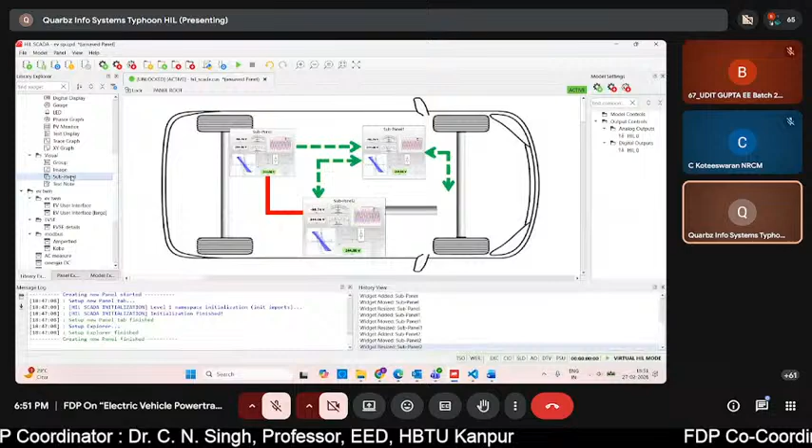I will just place them according to position. The first one goes here between the red and the green arrow. The second one goes between the 2 green arrows. The third one we are going to put at the bottom between the red and the green arrow. And the last one, again, between the green arrow and the silver bar.

Now, other than these 4 sub panels, we are also going to take 4 gauges. Gauge is under the monitoring widget because it is able to show us what type of output we are getting. So inside the monitoring heading, you will be able to find the gauge. Let's just search for it and then place it.

So the first one we'll keep between these 2 sub panels, just like that. Let me see if I can change the size even more. Yeah, this is fine.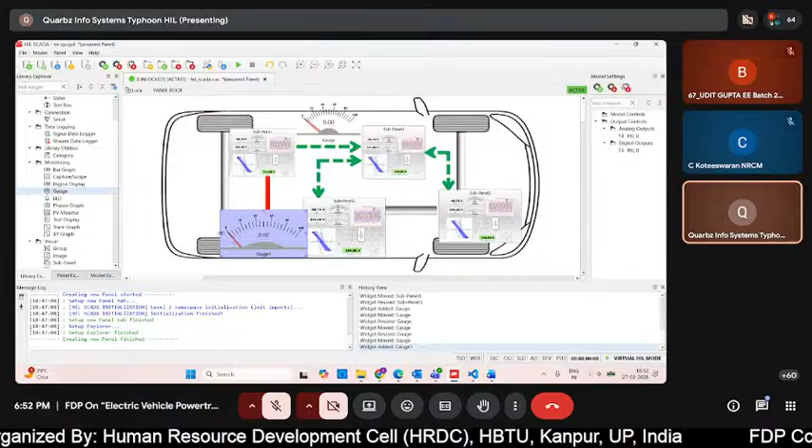Next, we will take one at the bottom here. After this, we will take the next one in between these 2 subpanels, and the last one we will take at the top above this panel. That's it—4 gauge components and 4 subpanels.

Now let's quickly name each of them. We will start with the first subpanel from the left. Not double click, just right click, go to properties, and change the name to Battery Storage. I will complete it very quickly so that we finish on time.

I'm hoping to complete the model. Then we have the second one, named Propulsion. We have the third one, again in properties, named Mechanical Transmission. And lastly, we have the fourth one, by the name of Control Center.

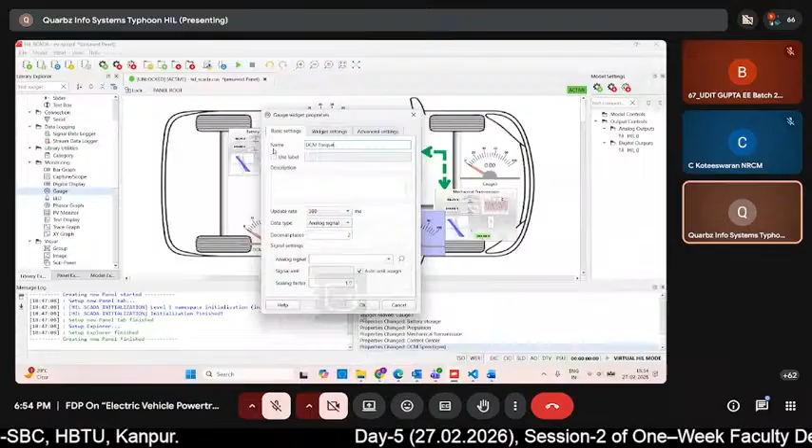The second gauge we have is for the DC motor torque, in the bracket Newton meter. Here we have the vehicle velocity, in the bracket kmph. And the last one, at the top, is battery SOC.

So for all 4 gauges that we have named, we just need to assign the signal that we want to visualize in this panel. We will double click, and at the bottom you can see there is this option of analog signal. I will name all 4 signals that we are going to select here.

This one is DCM speed, so we will search for DCM speed. You can see we are able to find the name of that particular signal in this list. Similarly for all 4 we have to do this. Suppose for battery SOC, I will search battery SOC estimated, and select this one.

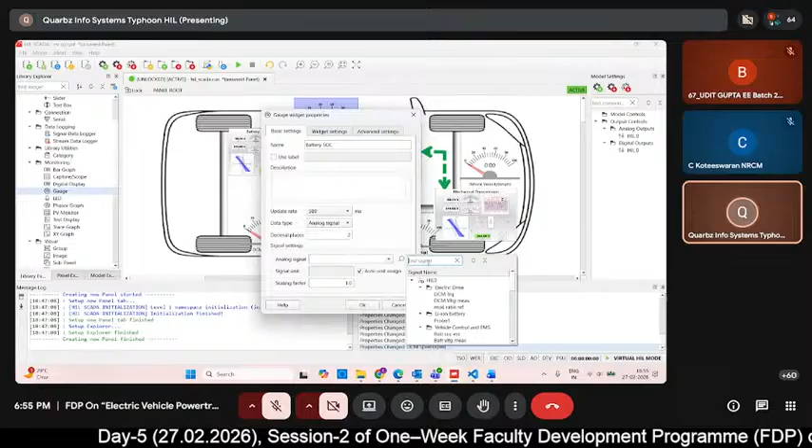So we just added battery SOC here. Let me find it again - battery SOC estimated.

This one is for the DCM speed. Next, we have the DC motor torque, so we search for DC motor torque and take the one with DC motor torque requested. And the last one is the vehicle velocity, so we search for vehicle velocity or vehicle speed.

Now the most important panel amongst all 4 is the control center, because here only we are going to observe all the results. So what I'm going to do is take a few widgets inside the other 3 panels to quickly show what values we are getting, but we will focus on the control center one.

So let me take 3 digital displays. Similarly we have another one, so 3 of them. There are 3 things that we want to see inside the battery pack - one is the SOC, one is the voltage, and one is the current. So we will quickly name them.

This one is SOC, you can use the SOC estimated signal. After this we have voltage and current.

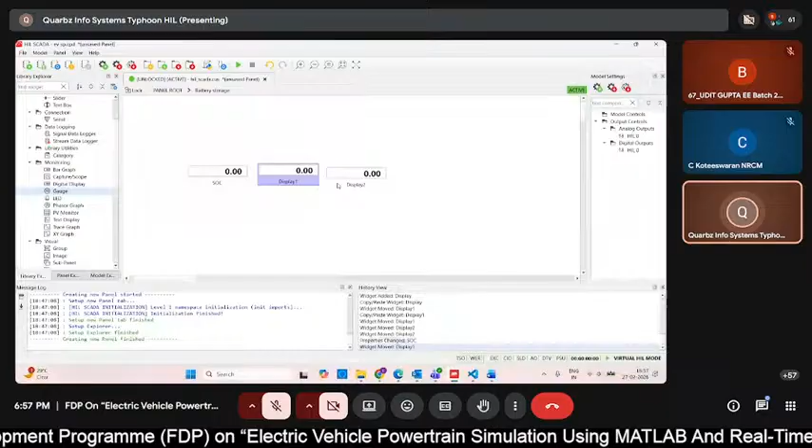Now to display these, you can also use other widgets for monitoring, like trace graph is there, so you can use trace graph also. You can also go for gauge widget, so multiple widgets are there. That is completely optional. Because we just want to see what value we have, I'm just taking digital display, but it's completely optional for you to take any.

So you can see we have battery voltage measured. And the last one we have is the battery current. Let me search for current. Okay, let me see the name.

I think I used a signal, but I haven't placed a probe at the battery current. Let me quickly do that. Okay, so the name is probe 1, I actually didn't change the name of it. So instead of searching for battery current, I will search for probe 1. You can see, just select this, and come back.

Now we have the propulsion subsystem. So inside propulsion, what is most important to visualize? It is the torque and the speed, and along with that, whatever is the DC motor voltage and the current. So we will take 2 gauges.

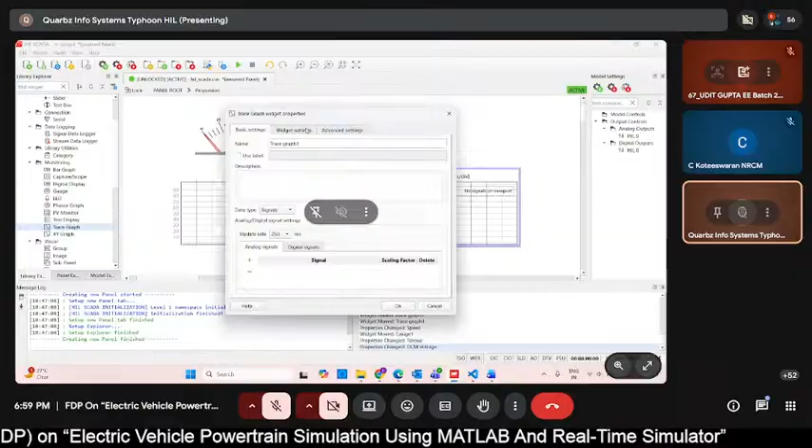Then in the graph, because this is for the DC motor voltage and current, we will add one of the analog signals and do the same process - DC motor voltage measured. And over here we have DC motor current, so again add one of the signals and we will search for DC motor.

Done, let's come back. Third is the mechanical transmission. In the mechanical transmission, we know that we only have the force and the velocity. So we will take two of the digital displays here, or we can take gauge also. So let's take two gauges and name them.

One will be the vehicle velocity. Let's search for the signal name - so this is by the name of vehicle speed.

And the second one we have is traction force. You can just search for it. So the name for the traction force will be vehicle tractive force. That's it, so we are done with the mechanical transmission.

Now let's come to the control center. This is the final sub panel, so we will create the entire panel here. What we are first going to do is divide it into three parts.

So we will take a group here. Let's take three of the groups and drag and drop them. The first group at the top, this is also inside the visual heading. One group. Similarly, we will take another one at the bottom, and similarly, we will take another one.

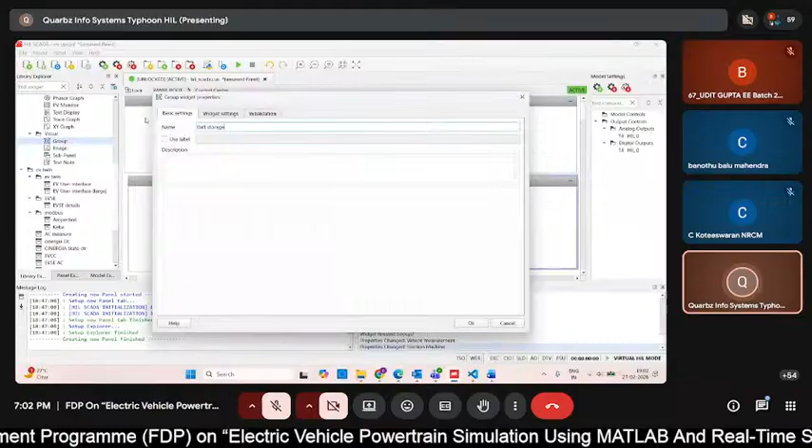So again inside it we will take some widgets for monitoring. First of all, we will take a gauge at the top here. We will take two more gauges, one will be here and another one over here. Then we will take, I think, trace graphs. So we have one trace graph over here, we have another one over here, and we will take one over here.

And we need one, or I think we can skip that because it's for the same signal. So we have gauge as well as graph both for the SOC, so it's better if we take only one. Similarly, we will just resize them.

That's it. And let's see if we can take one more here. Okay, I want to reduce the size of this one. And in the same way, I want to take another graph here. I have to, I think, expand this particular panel.

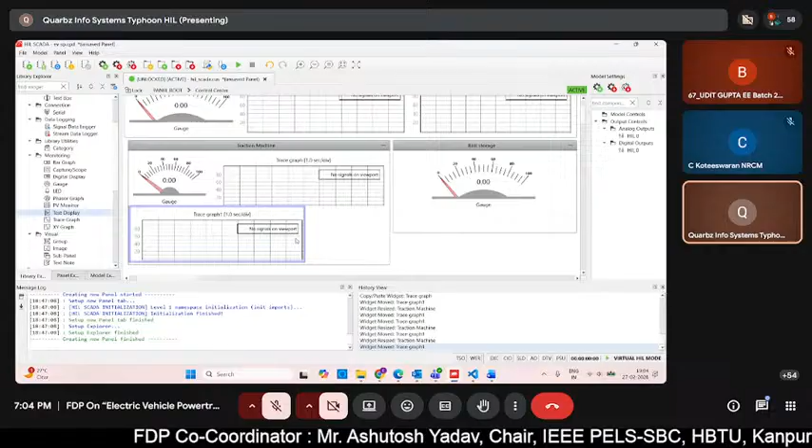Now let's start naming them. So the very first one is vehicle velocity. Here we have the update rate as 250, analog signal, the decimal is 2, and then we will search for the vehicle speed. After this, we have scaling as same.

We will go to the advanced settings. Here we have minimum as 0, and in the maximum we will select 60. Then we have the trace graph for the requested velocity, so we will just name it as vehicle requested velocity. We will add a signal here and just search, sorry, we'll search for requested speed.

And over here we are going to see the measured speed as well. So now this is the most important graph, because the requested and the measured, they should match with each other. Then only we can validate that yes, the drive cycle is actually following the input. So let's quickly name it as vehicle measured velocity.

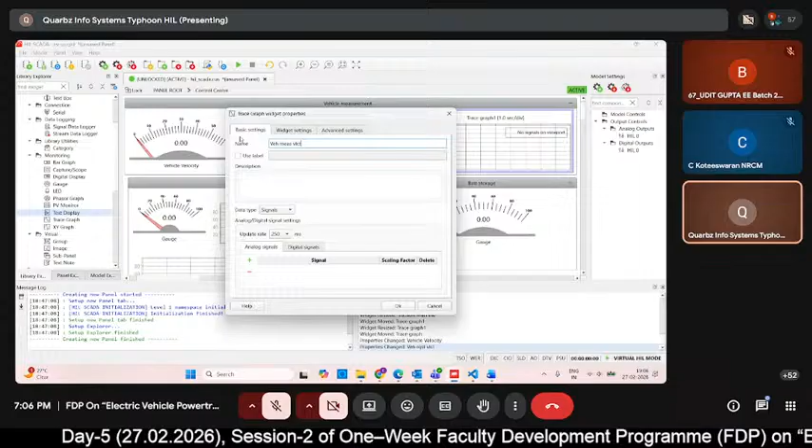Add the signal here, we'll name it as, just a second, vehicle speed. At the bottom here we will just take battery SOC. Just search for SOC here, and this one is 250.

Click OK. Here we have the speed. The update rate will be 250. We are just searching for the DCM speed. And in the advanced settings, we will set the range between 0 to 2000.

And the other two trace graphs which are left at the end, this is the speed graph, so we'll just quickly add it by the name of DCM speed only. Click OK. And the bottom one we are just going to name it as the mod ratio, or sorry, it's the torque. And we will add the signal here by the name of DC motor torque. That's it.

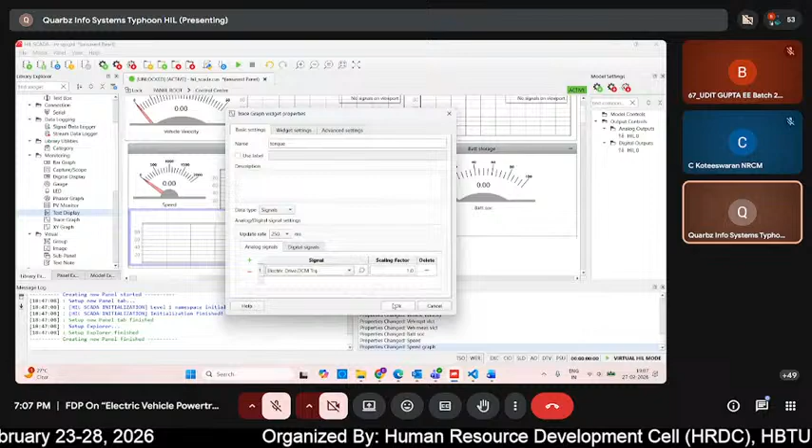Just a second, let me check one more thing and then we are finished with this. So we will just quickly run the model and see what kind of result we are getting. Just one little change in the advanced settings, we need to change the time window to 200 seconds for both the results.

Finally, we have completed this panel as well, and along with this, we have completed the SCADA panel. Here we have these red arrows, which are helpful to save the panel file. You can just save this panel if you have created now, and we are ready to run the model.

Let's click on the green play button and start the model. You can see what is the initial battery SOC we have. This is around 90%. Now we are just following the same graph. In the graph we have seen, we had a constant line at the beginning, then slowly we started accelerating.

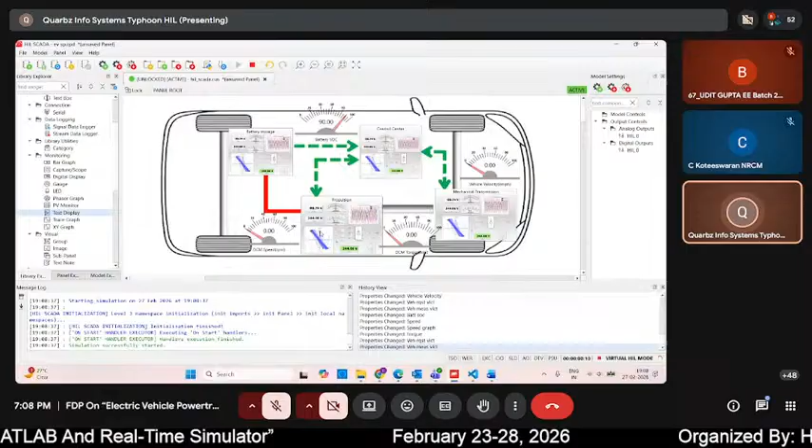Once we accelerate slowly, you will see the DC motor speed will start increasing, the torque will increase, similarly the velocity will rise. And because the vehicle is moving, the SOC will be consumed. You can see the same behavior here.

After that, it will remain constant for a few seconds. Once it is constant, it will start decelerating and the torque will move towards negative, similarly the speed also. Then it will go back to 0 and remain constant, so everything later on will again become 0. Once it drops to 0, after that it will start to accelerate again, so you can see how the torque is again positive.

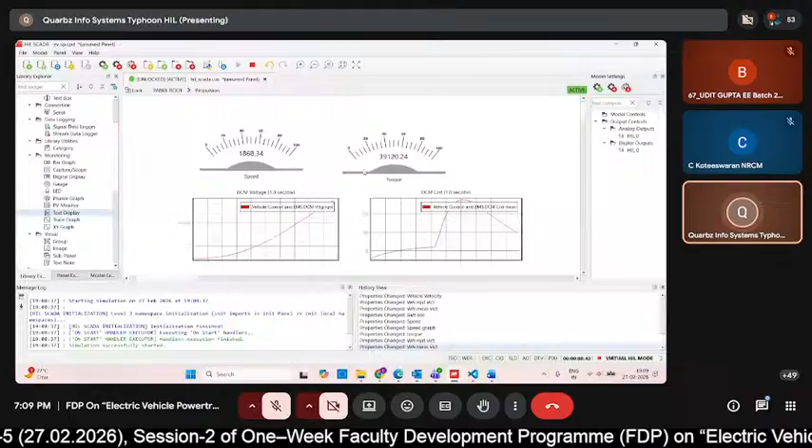Let's see what kind of figures or values we are getting here. We have SOC, battery voltage, and battery current. We have the propulsion system with the control, the DC motor voltage and DC motor current, as well as the speed and torque values. We have the mechanical transmission unit with the vehicle velocity and the traction force, and we have the control center.

I think there is some issue here because it's not ideally exactly matching the behavior. However, now you can see it started accelerating again, so the behavior is changing, but this is in reverse way. So I think something in the model is missing.

Let me see if I can quickly change it. Okay, I think there is just a little bit of change of execution rate somewhere. In all the blocks, we did not mention the execution rate as TS, because of which the time synchronization is not proper.

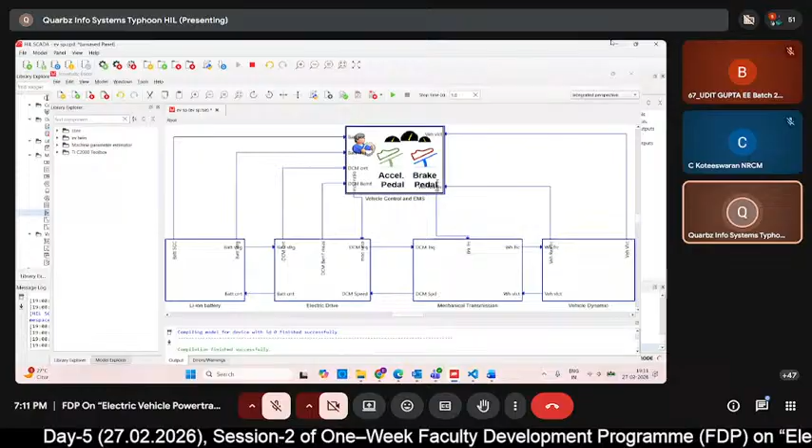But of course it will take some time for us to do the changes again. Instead, since we are already above time, I will stop the session here, but I'm going to tell you for reference where this example is actually saved. Once you open the software, the very first window you open, you can see the example section. In example section, you can just search for EV, and once you type EV, you will get, okay, SP.

So this is by the name of electric vehicle SP. Inside the electric vehicle SP model, you will find the same example—it is already present in the example section. You can open this model, check what is different between our model and this model, and accordingly make changes, edit your own file, and you are ready to have the model.

So for reference also I have told you, in case any of you is facing any issue, you can try to modify it. However it's a very small change that will be there. I'm pretty confident because I made it in a hurry, so I think we missed out the execution rate part. But I hope everyone understood the model, and that's it from my side.